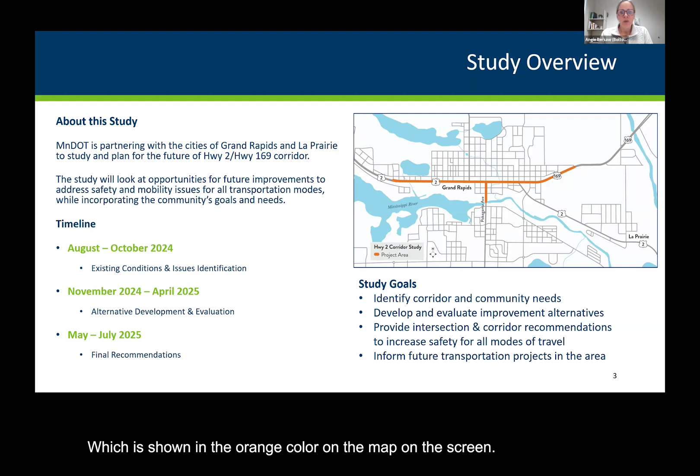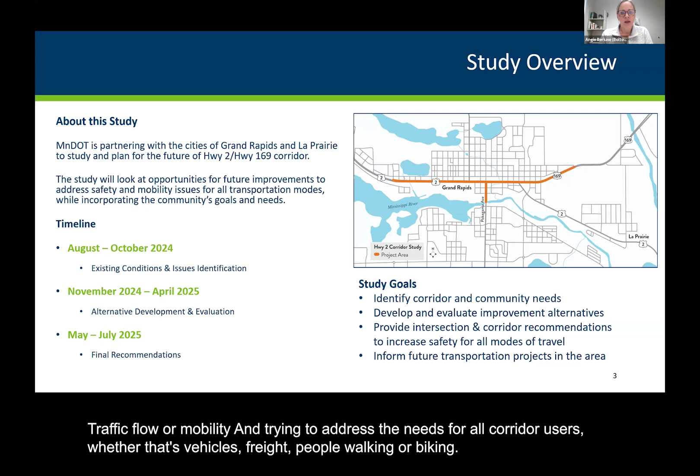Just a little bit of an overview of this study. MnDOT has partnered with the city of Grand Rapids and La Prairie and is studying the future of Highway 2 and Highway 169, shown in orange on the map. This study is looking at opportunities to address some needs in these corridors, specifically safety, traffic flow or mobility, and trying to address the needs for all corridor users, whether that's vehicles, freight, people walking or biking, and other community goals for development, redevelopment, and economic considerations.

There is currently no funding for future improvements on this corridor programmed yet. However, MnDOT is aware that there is aging infrastructure and will use the outcomes of this study to influence future projects along the corridor.

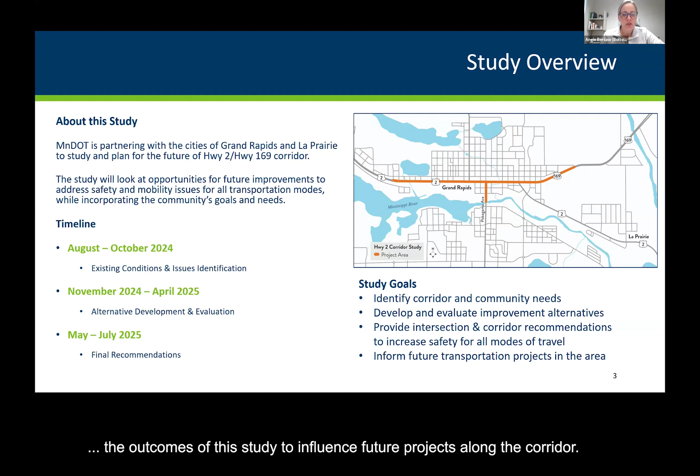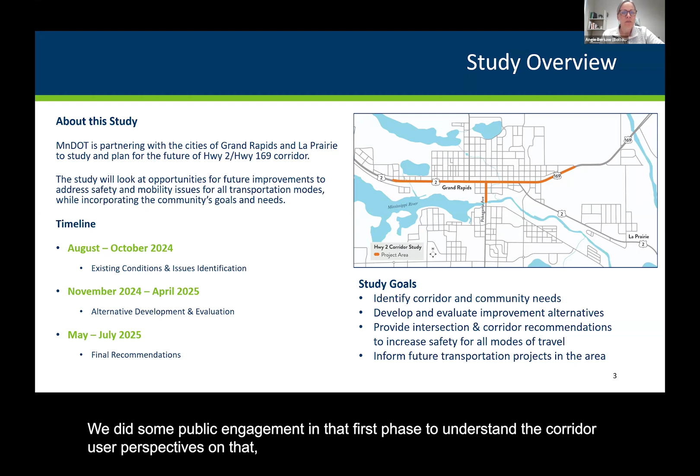Our timeline: we have been working on this study since August of 2024, working through a series of investigations to understand the existing needs and issues along the corridor. We did some public engagement in that first phase to understand corridor users' perspectives. Since November we've been working on the alternative development and evaluation phase, looking at what improvement alternatives we should consider and how they compare to addressing the needs and to one another. We'll finish up our study by July of this year, working on final recommendations to leave this in a good spot where it can help inform future transportation projects.

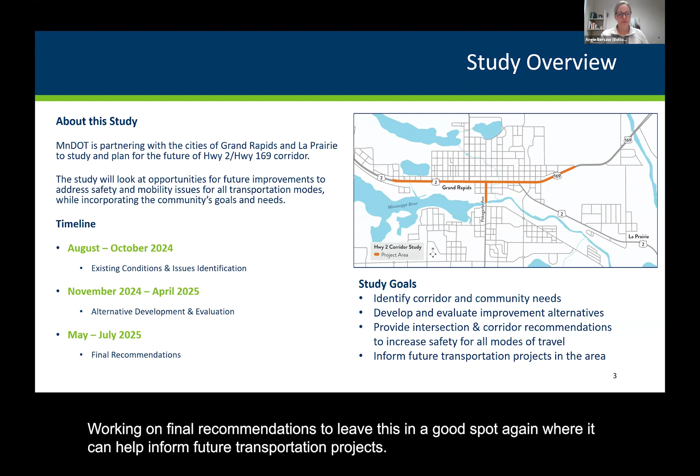A little bit about our process in terms of engagement. In our first phase, back in the fall of last year, we worked with the public at an open house, held key focus group meetings with businesses, freight interests, economic groups, and worked with the various cities to get their input on issues and needs. We also held a pop-up event and did some online engagement. We had great participation: over 200 surveys completed, and about 50 people attended our various engagement events.

So we are now in what we call phase 2, where we are doing this open house, both online and in person. We are again repeating some of our focus groups and agency coordination, and we'll keep our survey open online as well. Then when we get to our final recommendation phase in the spring and summer, we will repeat these engagement events again, trying to capture input from a variety of corridor users and community interest groups.

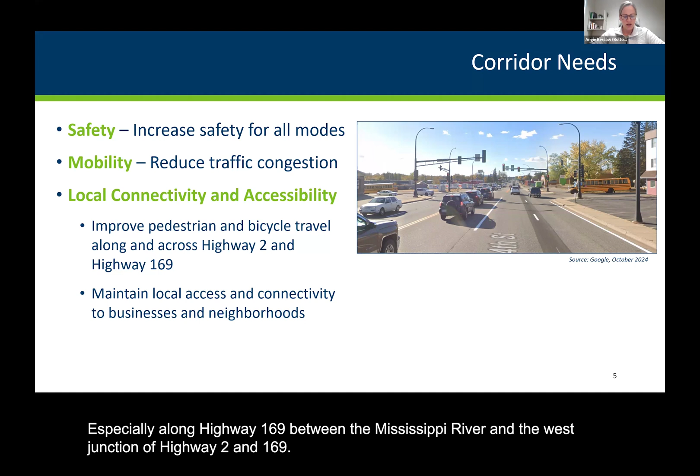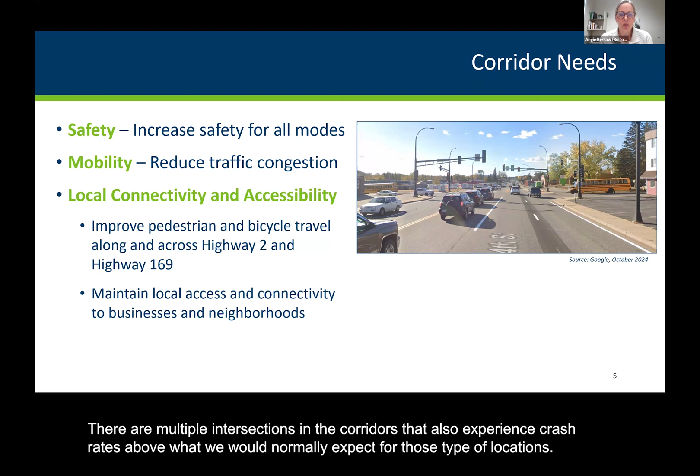This is a summary of our corridor needs. We have three main categories identified through our work and earlier public engagement: safety, mobility, and local connectivity and accessibility. In terms of safety, the existing corridor experiences a lot of crashes, especially along Highway 169 between the Mississippi River and the west junction of Highway 2 and 169. There are multiple intersections in the corridors that also experience crash rates above what we would normally expect for those types of locations, and several intersections were flagged in the previous study by MnDOT as high-risk locations.

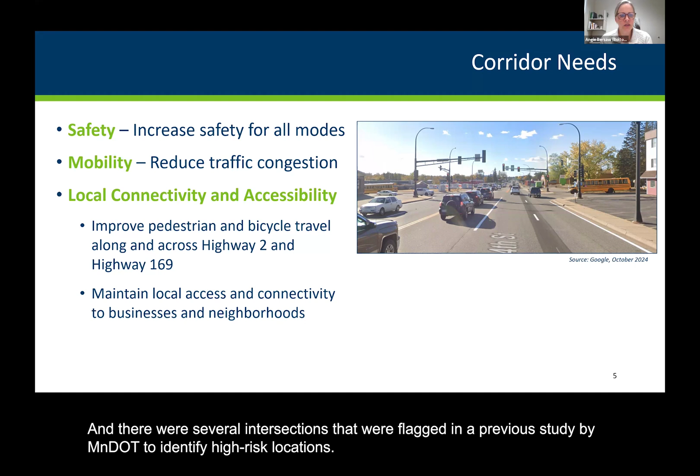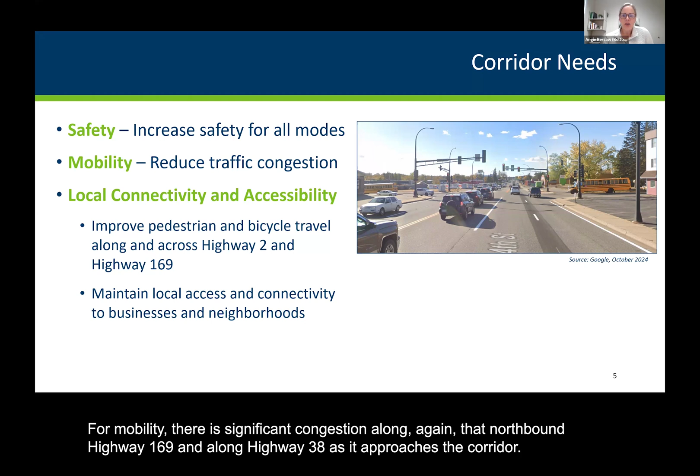For mobility, there is significant congestion along northbound Highway 169 and along Highway 38 as it approaches the corridor. We also heard from the public during our first phase of engagement that the far majority, I think it was 90% of people who completed our survey, noted that they are concerned about traffic flow along these corridors.

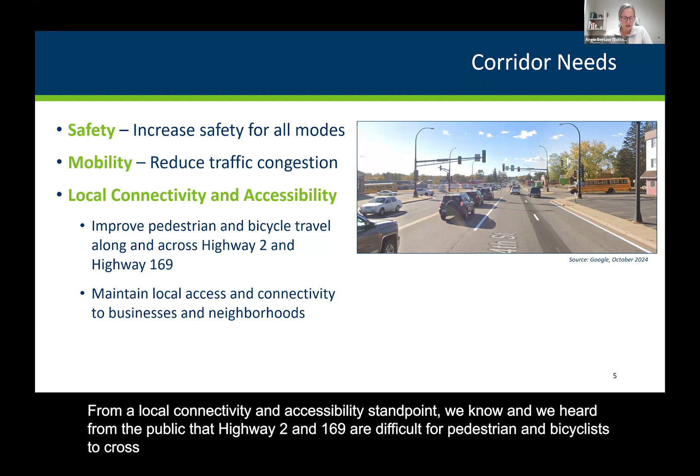From a local connectivity and accessibility standpoint, we know and we heard from the public that Highway 2 and 169 are difficult for pedestrians and bicyclists to cross due to the number of lanes, the distance, and high traffic volumes. We also know that thinking about access and how these corridors connect to businesses and neighborhoods is important.

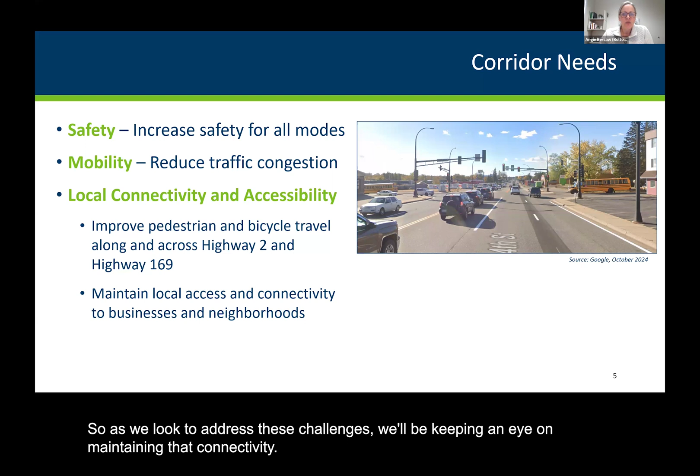So as we look to address these challenges, we'll be keeping an eye on maintaining that connectivity.

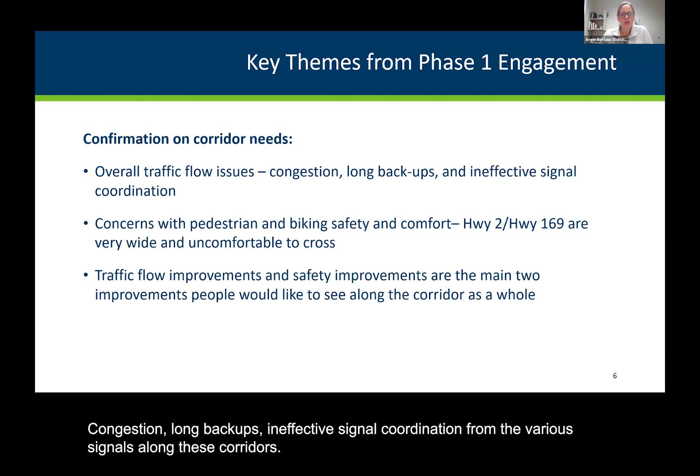On our next slide, we'll talk about some key themes, similar to my previous slide on corridor issues and needs. What we heard loud and clear from the public in phase 1 was that overall traffic flow issues are a major concern: congestion, long backups, and ineffective signal coordination along these corridors. We also heard about pedestrian and biking safety and comfort, since these corridors are very wide and uncomfortable to cross. Traffic flow improvements and safety improvements are the two main things people would like to see along these corridors as a whole.

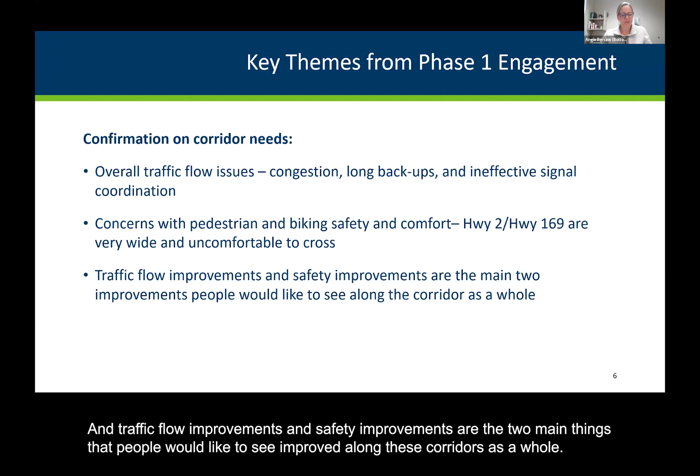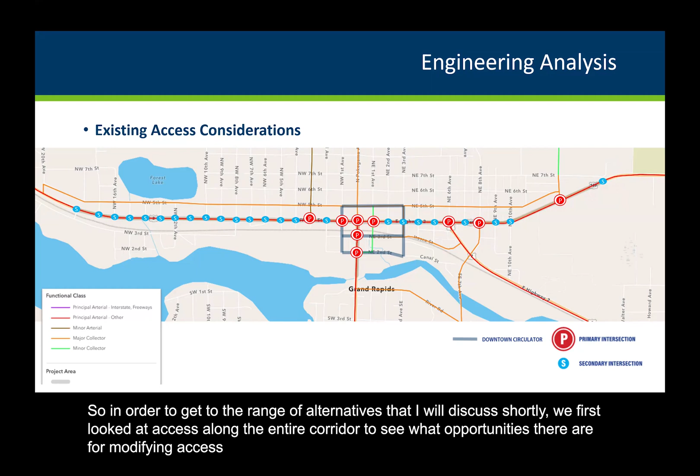So in order to get to the range of alternatives I'll discuss shortly, we first looked at access along the entire corridor to see what opportunities there are for modifying access in order to meet other goals, like pedestrian crossings and smoother traffic flow.

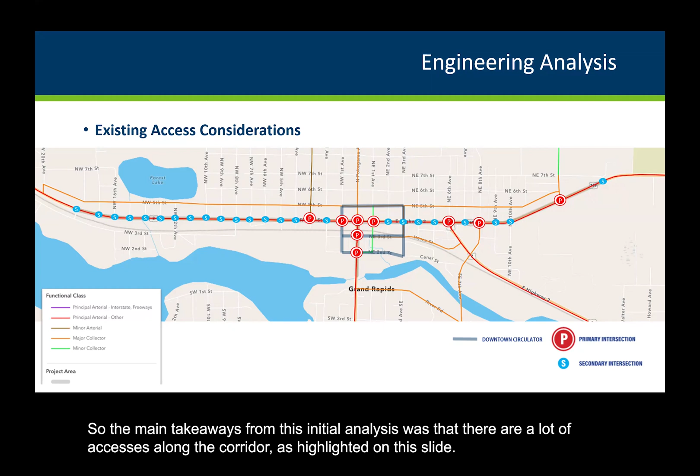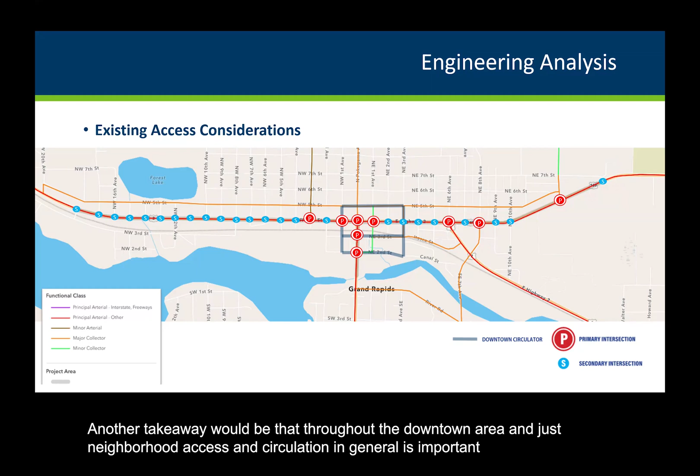The main takeaways from this initial analysis were that there are a lot of accesses along the corridor, as highlighted on this slide, and that some of the traffic signals on the corridor today are not justified. Another takeaway is that throughout the downtown area, neighborhood access and circulation in general is important to maintain throughout the corridor as alternatives are considered. We need to think about this network for cars, trucks, as well as pedestrians and cyclists.

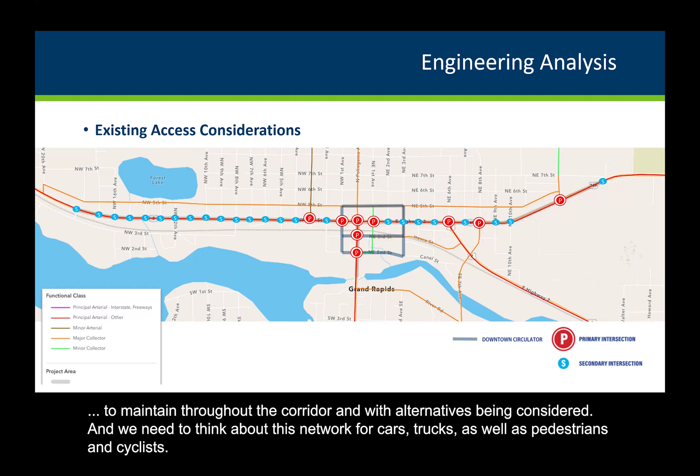Additionally, knowing there are plans for redevelopment on the west side of Highway Corridor 2, we want to make sure that anything we're showing allows for future advancement of that redevelopment.

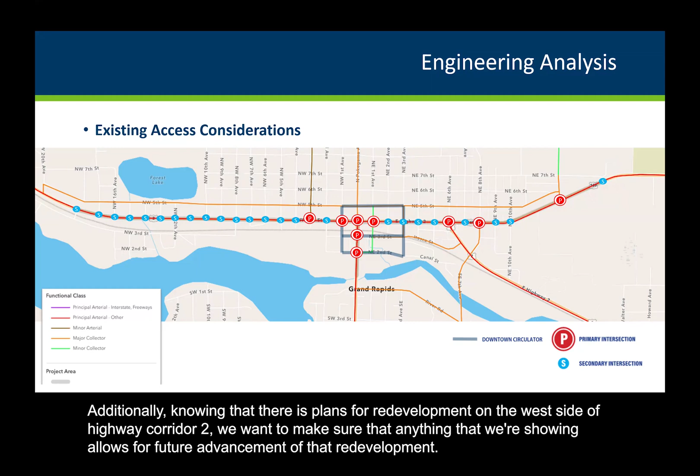So building on the needs identified in our technical analysis and the public input we received, we looked at both individual intersection needs and how to package these needs into corridor considerations. These are the types of questions we started with to develop the improvement alternatives, which are shown online.

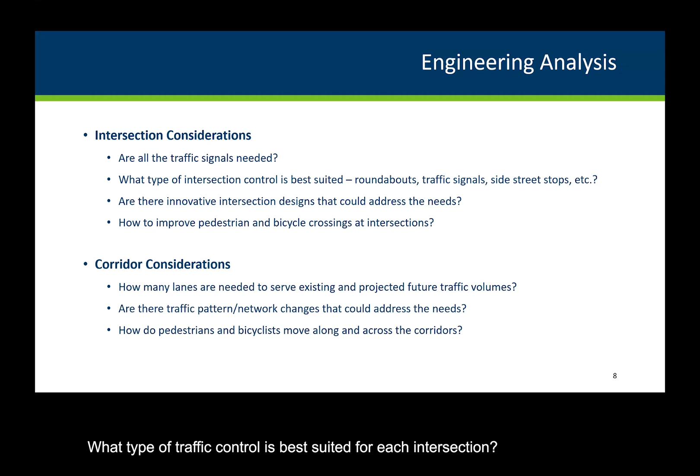Looking at intersection considerations, we considered where traffic signals along the corridor are needed and what type of traffic control is best suited for each intersection. We looked at whether there are innovative intersection designs that could address the needs we discussed previously, and how we can improve pedestrian and bicycle crossings at each intersection.

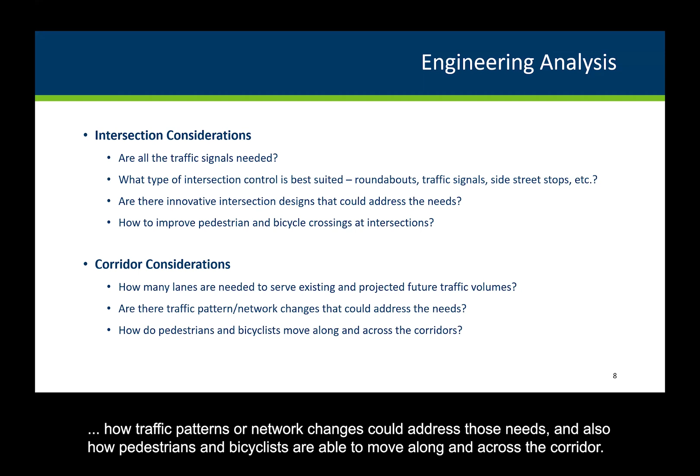From a corridor perspective, we analyzed how many lanes are needed to serve existing and projected future traffic volumes, how traffic patterns or network changes could address those needs, and how pedestrians and bicyclists are able to move along and across the corridor.

We did end up dismissing a few alternatives at this point. We have more information online about the three alternatives, but I'll give a brief overview of each.

First was rerouting of Highway 2. This was dismissed as most traffic was found to actually stop in town, and therefore a bypass of Highway 2 through the Grand Rapids, La Prairie area would be minimally used.

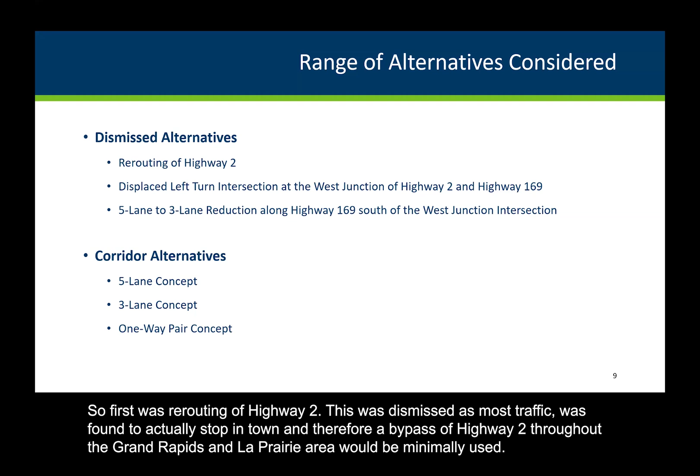We also considered an innovative intersection design known as a displaced left turn intersection at the West Junction intersection of Highway 2 and Highway 169, where we are seeing the most congestion today. This was considered but ultimately dismissed as the design would be too impactful to nearby properties.

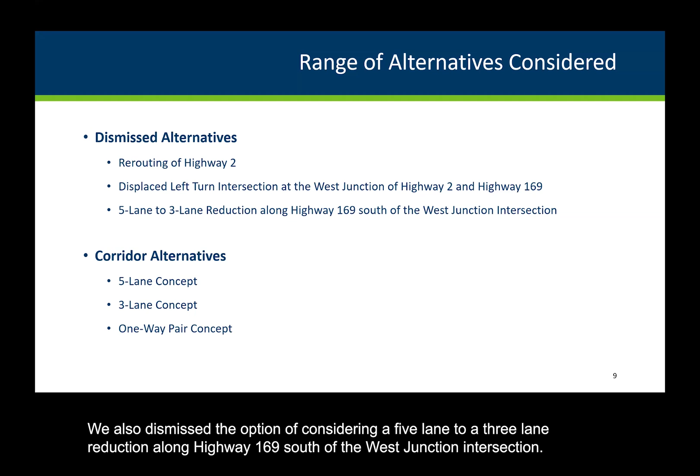We also dismissed the option of reducing Highway 169 from 5 lanes to 3 lanes south of the West Junction intersection—the north-south portion between that intersection with Highway 2 and the Mississippi River. This was dismissed as it was found that increasing traffic queuing and delay would result from this reduction, which is where we see congestion today. So we did not want to make a condition that's already bad out there even worse.

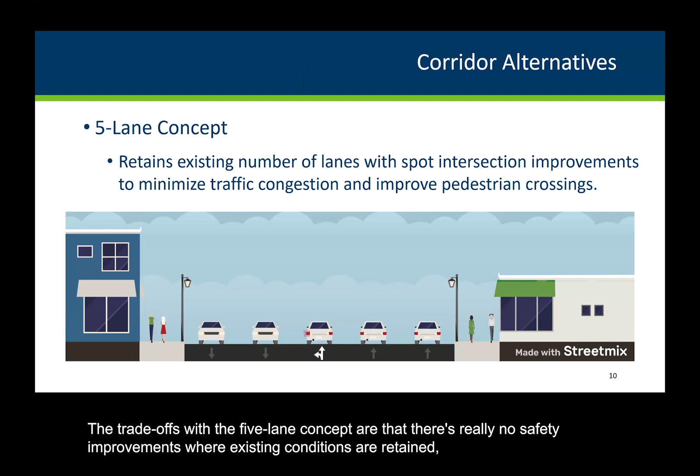This led us to three overall corridor alternatives. The first is a 5-lane concept, which really retains the existing number of lanes out there today with spot improvements to minimize traffic congestion and improve pedestrian crossings. The trade-offs with the 5-lane concept are that there are really no safety improvements, since existing conditions are retained. There is no reduction in crossing distance for pedestrians, as they would still have to cross 5 lanes as they do today, and pedestrian improvements would only be at locations where restricted access is proposed. So the majority of the corridor sees no overall improvement.

Another trade-off would be that where we have potential access restrictions, vehicle rerouting would be necessary. And depending on the intersection improvements that are recommended, there could be some right-of-way acquisition needed.

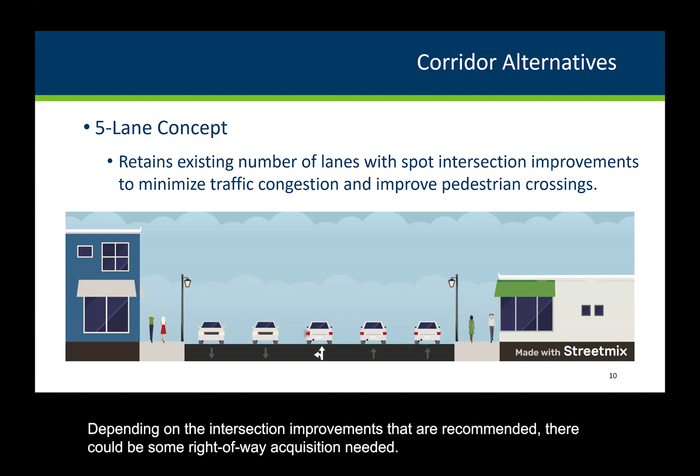The 3-lane concept reduces the number of travel lanes along the corridor in order to calm traffic, make driving smoother, and create safer crossings for pedestrians. This would add space for better sidewalks and landscaping on the corridor. So the 3-lane concept would have 1 through lane in each direction and a center turn lane.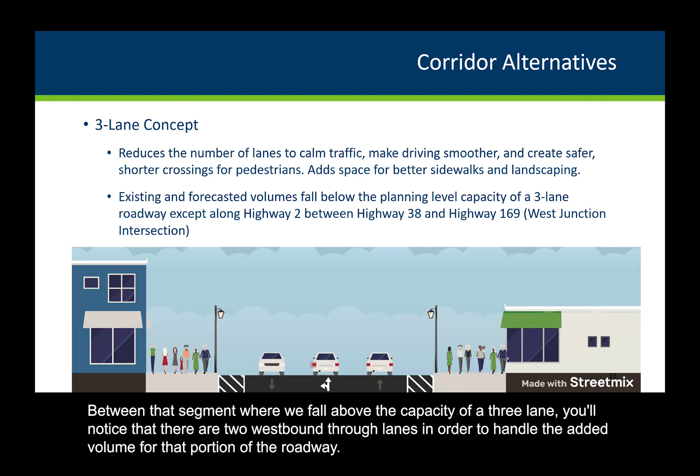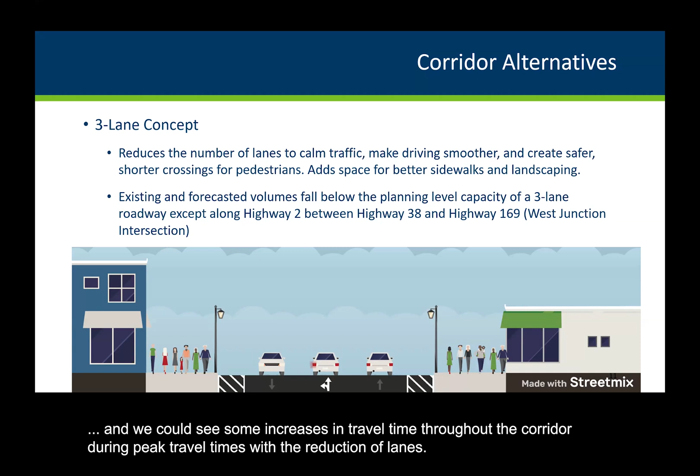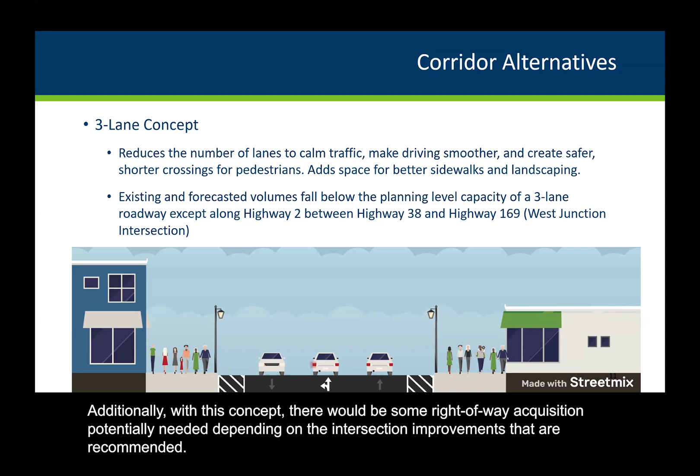Some trade-offs for the 3-lane concept include that some vehicle rerouting will be needed with access restrictions at spot locations. And we could see some increases in travel time throughout the corridor during peak travel times with the reduction of lanes. Additionally, with this concept, there would be some right-of-way acquisition potentially needed depending on the intersection improvements that are recommended. And the third alternative that we're showing is a one-way pair concept.

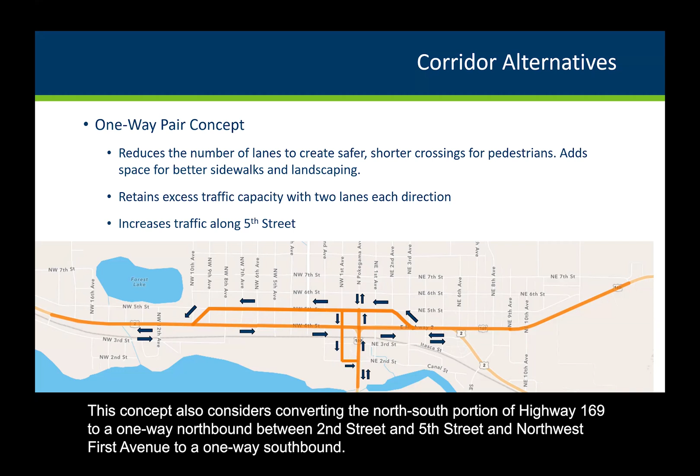The one-way pair concept would convert Highway 2 to a one-way eastbound and 5th Street to a one-way westbound between Northwest 10th Avenue and Northeast 3rd Avenue, as shown on the screen. This concept also considers converting the north-south portion of Highway 169 to a one-way northbound between 2nd Street and 5th Street and Northwest 1st Avenue to a one-way southbound.

The benefits of this one-way concept are that they would reduce the number of lanes in order to create safer and shorter crossings for pedestrians and add space for sidewalks and landscaping. This concept would also retain the existing traffic capacity with 2 lanes in each direction.

Another benefit is that we would see reduced congestion for motorists and freight with this capacity retained along the corridor, and increased safety for pedestrians and motorists with simplified intersections where the one-way routes are proposed.

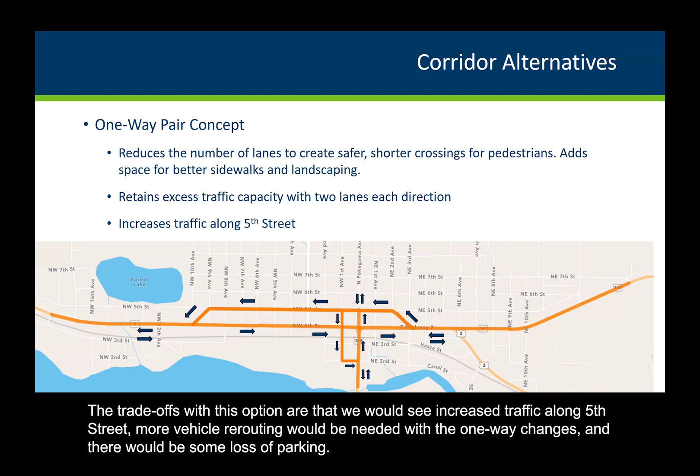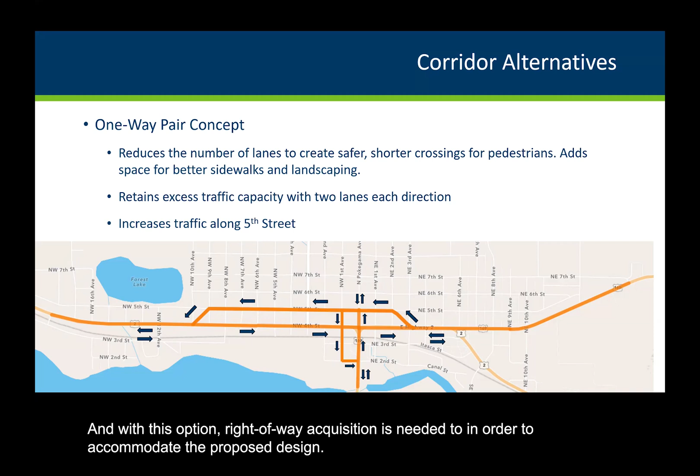The trade-offs with this option are that we would see increased traffic along 5th Street, more vehicle rerouting would be needed with the one-way changes, and there would be some loss of parking. Additionally, changes to the traffic flow could be confusing at first, and with this option, right-of-way acquisition is needed in order to accommodate the proposed design.

In addition to corridor-wide concepts, intersection control changes were also considered. Roundabouts and traffic signals are being considered for the higher volume intersections on the corridor. Roundabouts are able to provide traffic calming, improve pedestrian crossings, and improve the safety for motorists and pedestrians. However, they would require increased right-of-way, and there are concerns with the nearby railroad crossing so close to a roundabout.

Retaining signals are being considered as they would require no or minimal right-of-way acquisition, and railroad preemption is possible, which allows mainline traffic to continue to flow when a train is passing through and the side streets are blocked. However, retaining a traffic signal offers no or minimal safety improvement from the existing condition.

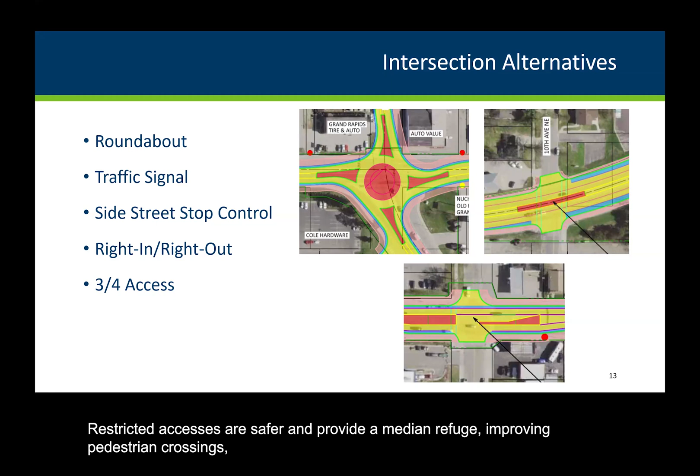For the lower volume intersections, full access side street stop controlled and reduced access intersections such as right in, right out, or 3/4 accesses are being considered. These intersections provide free flow condition for the mainline traffic and require no or minimal right-of-way acquisition needed. Restricted accesses are safer and provide a median refuge, improving pedestrian crossings, but the trade-off is that some of those movements that are prohibited would need to reroute to another intersection.

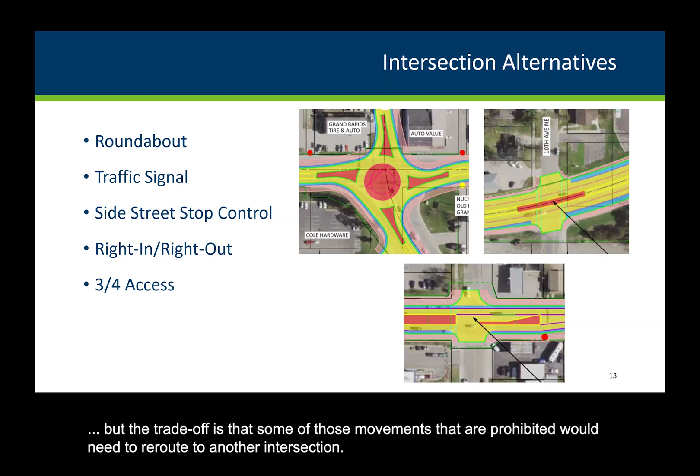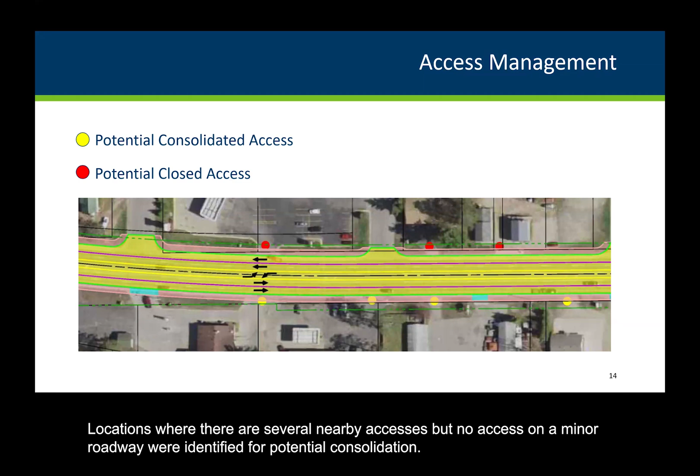Also along the corridor, access management was considered. We looked at the driveways that are out there today and locations where a second access to a property is available on a minor roadway was identified for potential closure. Locations where there are several nearby accesses but no access on a minor roadway were identified for potential consolidation.

We did this exercise to start the conversation with property owners. Nothing here is set in stone, but we are interested in your feedback on the proposed access changes and how they would work or would not work for your property's needs.

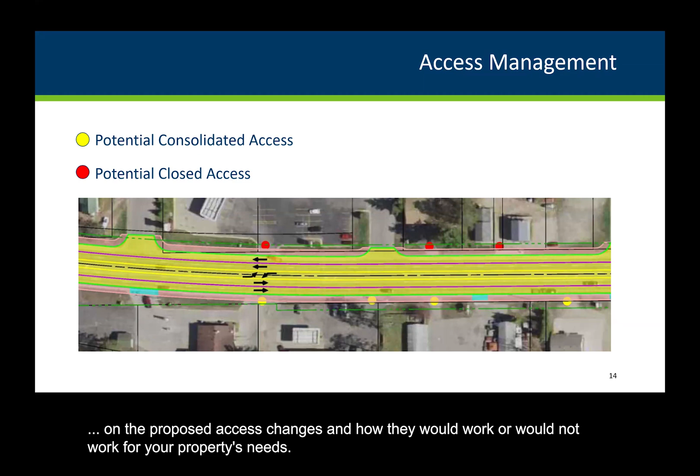Well, we know we provided you with a lot of information here in this recording. As I mentioned, we do have the full layouts and informational boards available on the website for your review. We are most interested in your feedback. We have a survey where you can complete your input. And we're really trying to get at, what elements do you feel would function well or wouldn't function well for your use, at intersections, along the corridor, with our various alternatives. So our survey will direct those questions specifically and allow you to provide any other type of feedback that you think we should know at this point.

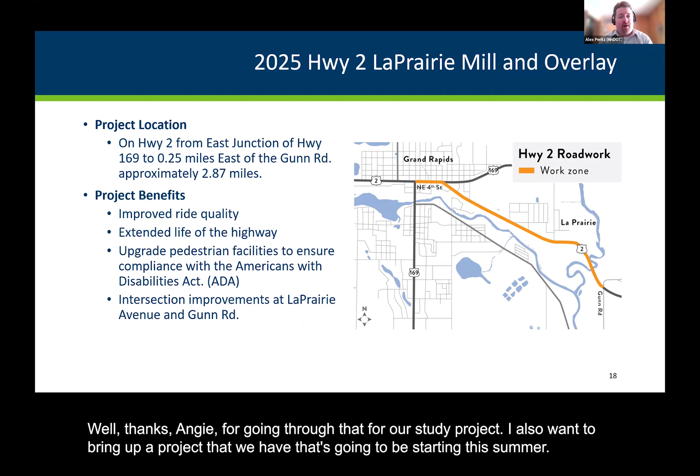I also want to bring up a project we have starting this summer in the La Prairie, Grand Rapids area on Highway 2, going from the east intersection of Highway 2 and 169 down to Gunn Road.

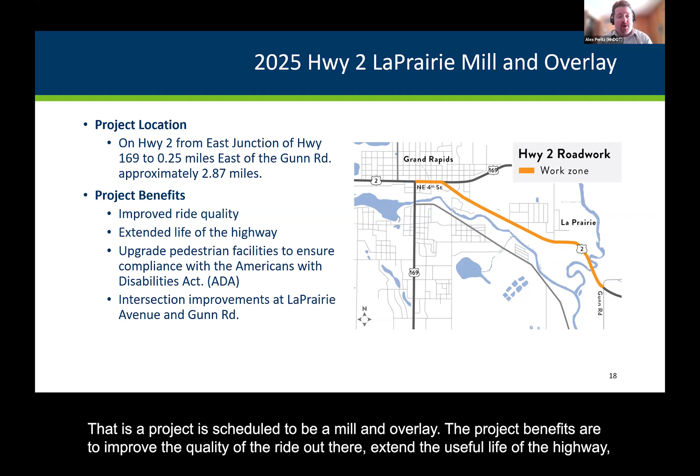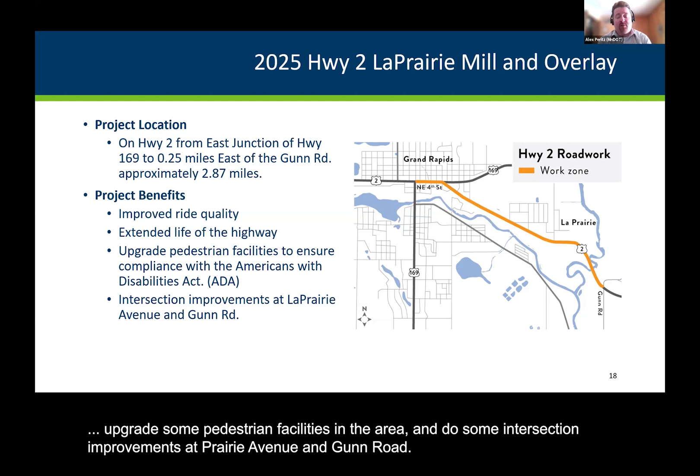That project is scheduled to be a mill and overlay. The project benefits are to improve the quality of the ride, extend the useful life of the highway, upgrade some pedestrian facilities, and do some intersection improvements at La Prairie Avenue and Gunn Road.

Our overall scope of the project is milling and overlaying the driving lanes. We're doing some paving on select areas of the shoulders and fog sealing the rest, and making improvements to all existing sidewalks to bring them up to ADA compliant standards.

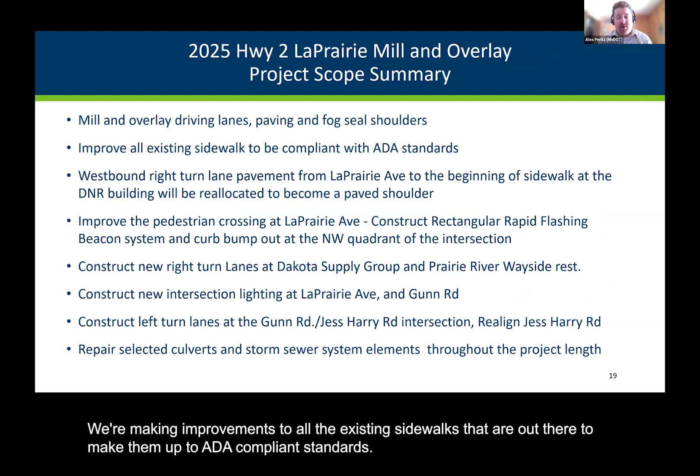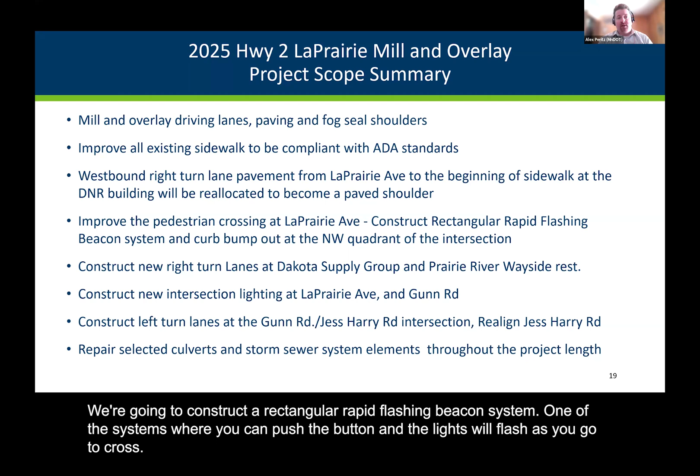We're going to improve the pedestrian crossing at La Prairie Avenue and construct a rectangular rapid flashing beacon system, where you push a button and the lights flash as you cross — not the overhead kind, but one closer to the ground. We'll also add curb bump outs to minimize crossing distance for pedestrians.

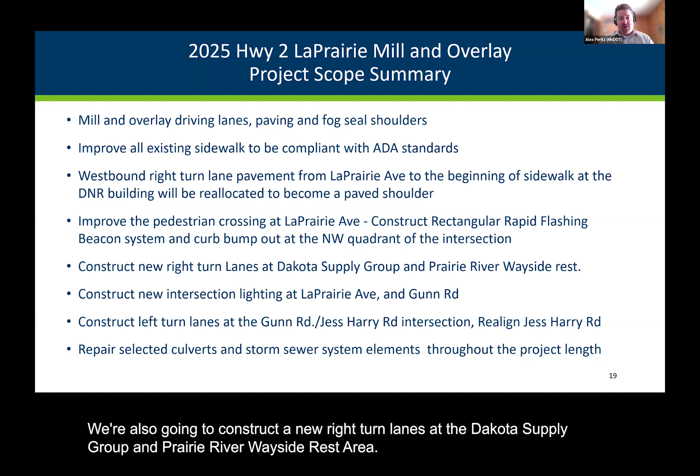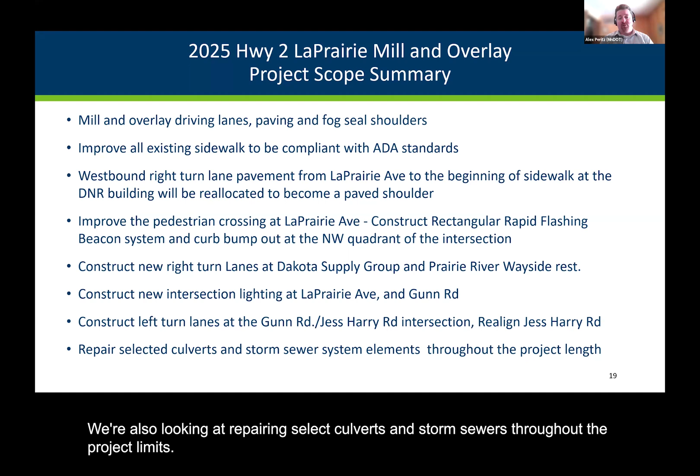We're also going to construct new right turn lanes at the Dakota Supply Group and Prairie River Wayside Rest area, new intersection lighting at La Prairie Avenue and Gunn Road, and left turn lanes at Gunn Road and Jess Harry Road. We're realigning Jess Harry Road so it squares up into the intersection instead of coming in at a skewed angle, and we'll repair select culverts and storm sewers throughout the project limits.

As for project delivery, it's our typical design, bid, and build process. We have not bid the project yet — that's scheduled to happen on May 16th. Right now we have an estimated construction cost of $3.6 million.

A bit on staging and traffic control: we're anticipating construction starting in July and going through October of 2025. The project is anticipated to be done under traffic.

Traffic will still be able to flow on Highway 2, but there may be times with lane closures, likely facilitated with flaggers or another method the contractor may choose.

We also anticipate some times between milling the bituminous and paving back the new surface when traffic will be driving on milled surfaces, but that will be for a short time period.

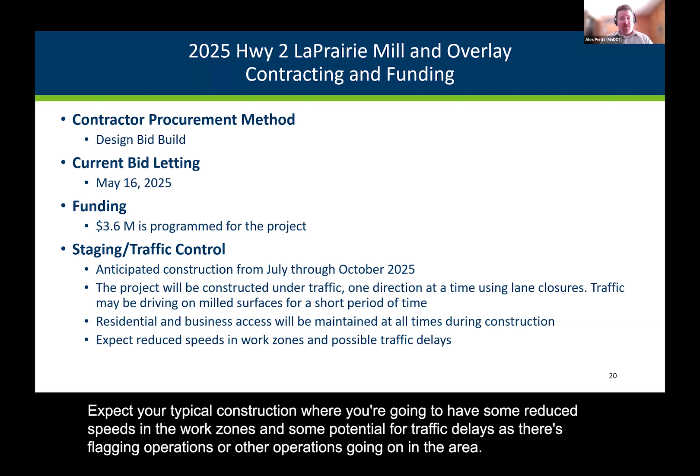During construction, all access to residential and business properties along the corridor will be maintained. Expect typical construction conditions, with reduced speeds in work zones and potential traffic delays from flagging operations or other work.